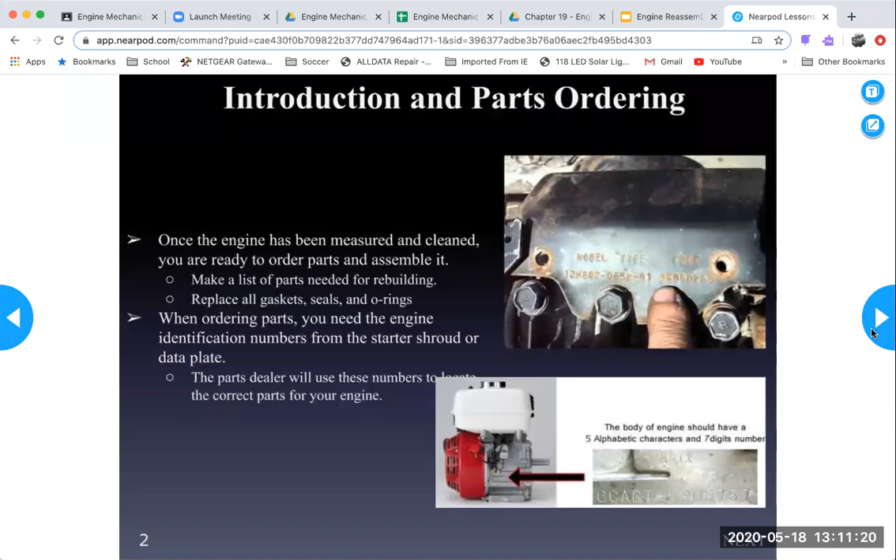Also, on overhead valve engines, these numbers are stamped on the valve cover on a Briggs & Stratton. Different manufacturers put them in different places, so you just have to look for them. You need to have them all when you go to order parts - all those numbers are needed.

Briggs & Stratton uses 3 groups of numbers that they need for ordering. If you look at this example: 126L02, this is the model number. The next group, 1015-F1, this is the type number - I'll explain what all this means in a minute. The last group, 1003-1858, this is the code number.

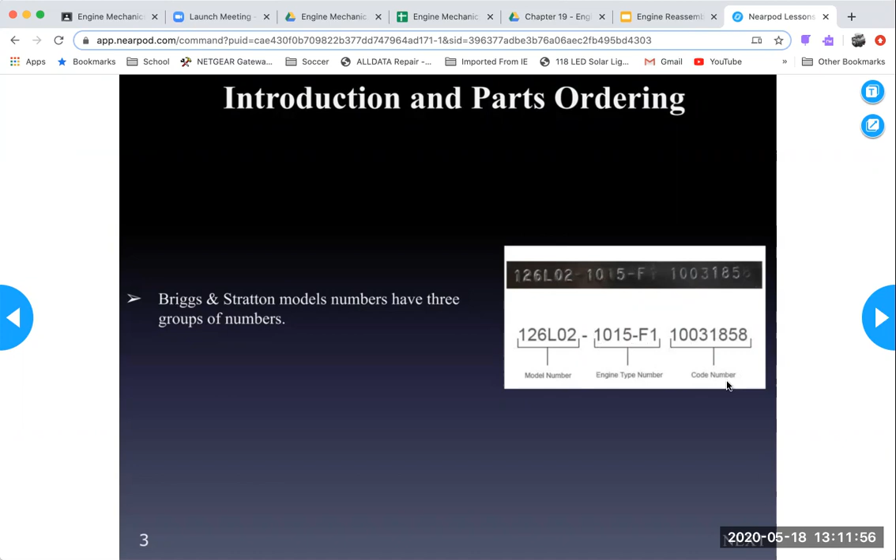Taking each one: the model number explains how many cubic inches the engine has, what kind of starter is installed, and other important information for ordering parts. It's going to be either a 5-digit or 6-digit number. If it's 5 digits, which they haven't made in a long time, the first number is the cubic inch displacement. But typically it's 6 digits, so it's the first 2 numbers. Look at my example here, 42 - that's the cubic inch displacement, a 42 cubic inch engine.

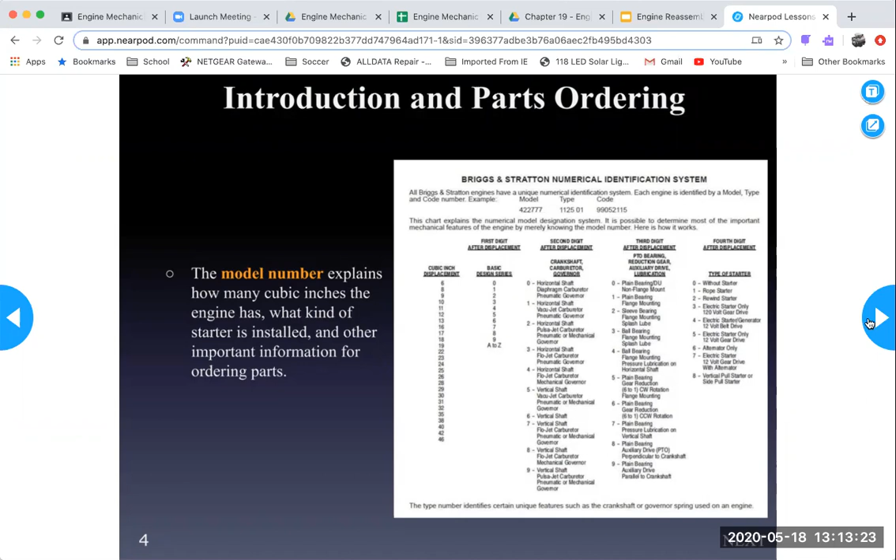Then you can see other information, not so important to us, like crankshaft position, the carburetor installed, whether it has a PTO or power takeoff, gear reductions, and the type of starter. This information is important for the engine, but not really for looking up parts. The whole model number is important, but breaking it down to understand what all those numbers mean isn't super important.

Brings me to my first question of the day: what engine number is 123K02 in the picture? So if I make that picture bigger - 123K02 - that first group of numbers, what does it mean? Is that the type? Is that the code? Or is that the model?

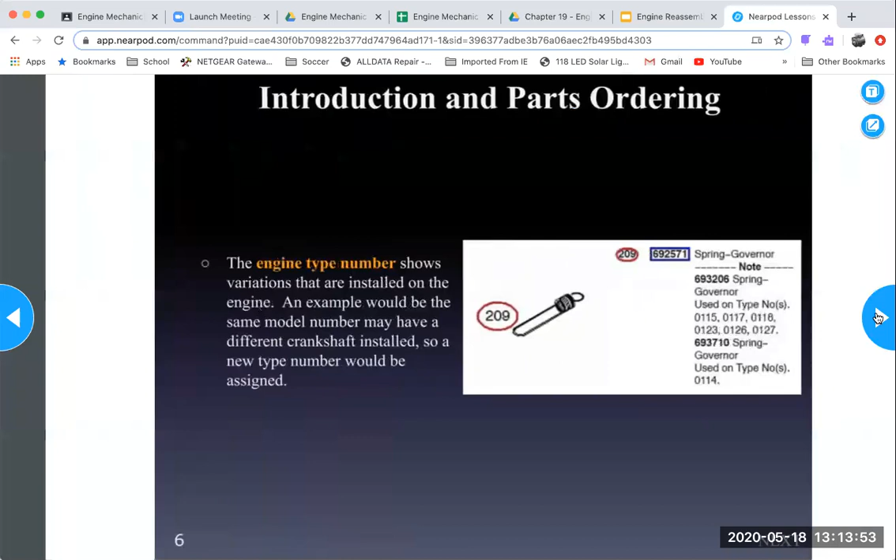The engine type number shows variations that are installed in the crank or on the engine. An example would be an engine that has the same model number but may have a different crankshaft installed.

So using this example, 692571 would be the spring for a governor, except if your type number was listed under these alternate part numbers. If your type number was 0114, you would use part number 693710. If your type number was 0115, 0117, or 0118, you would use part number 693206.

If your type number was not listed here, then this is the primary part number, 692571. I gotta say, since computers started, this has made it way easier. You just pick the right type number and you'll get the right part, the right spring in this case.

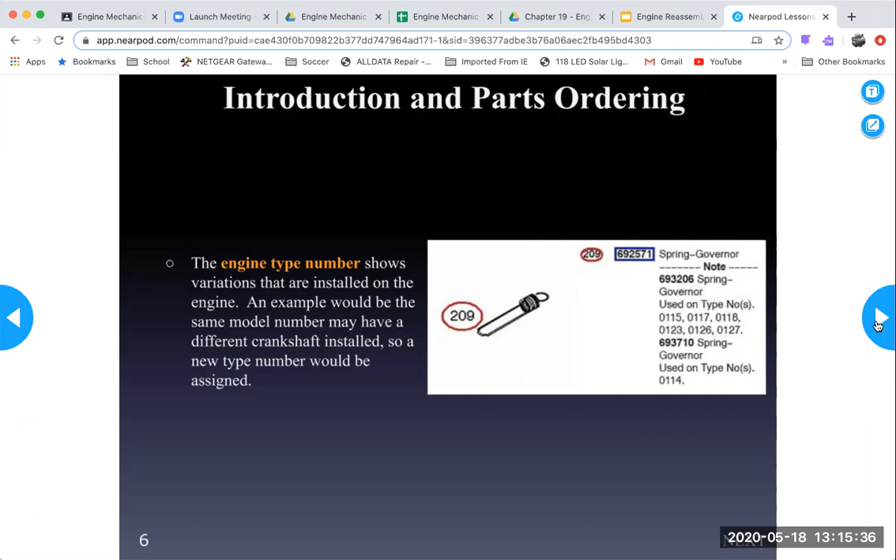When they used to have books and microfiche, this was pretty confusing. So these would just be variations - sometimes they'll have different crankshafts installed in the engine. The model number is exactly the same, the engine is exactly the same, but the only difference is they put a different crankshaft in there, so the type number would change while the model number stays the same.

Once again, looking at this picture, what engine number is 0195E1 in the picture? So 019, oh that's a 3, E1. What does that mean? Is that the model, code, or type?

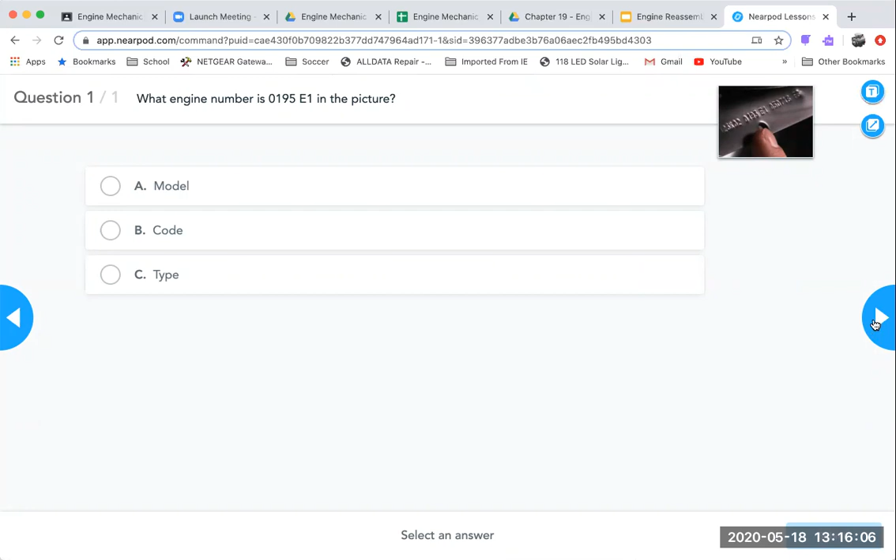Now the last number, the code number, is basically a date code that shows when the engine was made and by what plant. So if we break this thing down, the first two numbers is going to be the year the engine was made. In this case, the engine was made in 2001.

Then we have the second group of numbers, 06. This tells us the month - in this case, the month was June. And then the next two numbers, 1, 2, tells us the day. So this engine was made on June 12th, 2001.

And the last group of numbers, 01, is the assembly line and manufacturing plant. This allows Briggs & Stratton, in this case, to really focus on if there's warranty issues - they could tell you the day, the month, the year, and what assembly line and plant just by looking at these numbers, and if there's an issue coming, they could figure it out and possibly find a solution.

Maybe the rod caps were coming loose, the connecting rods were coming loose, and then they investigate and find this time frame where all this is happening, and they can go right to there and find maybe that worker wasn't doing his job properly. The supervisor can get involved and fix these problems. Or maybe a torque wrench used on the assembly line was not calibrated properly - they could fix those problems.

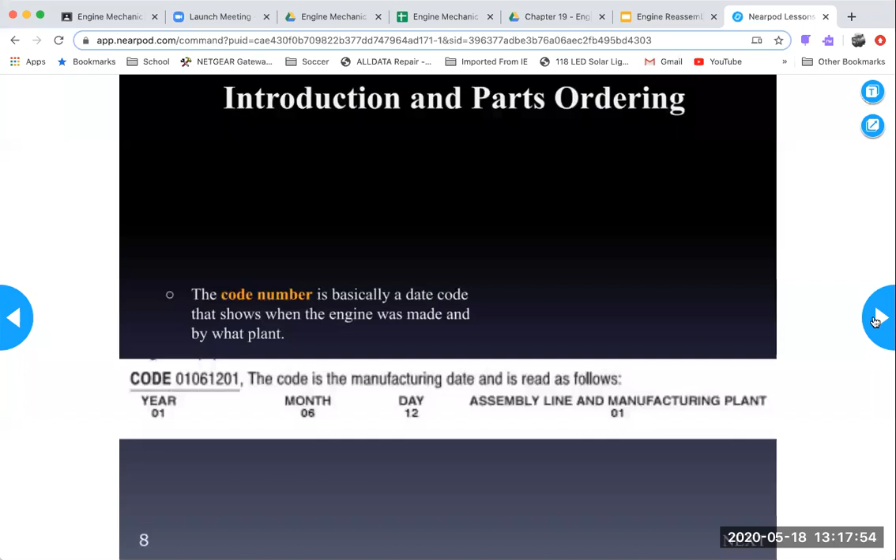Next question: what year was this engine made in? We're looking at these numbers - what year was that engine made in? 2007, 2005, or 2018?

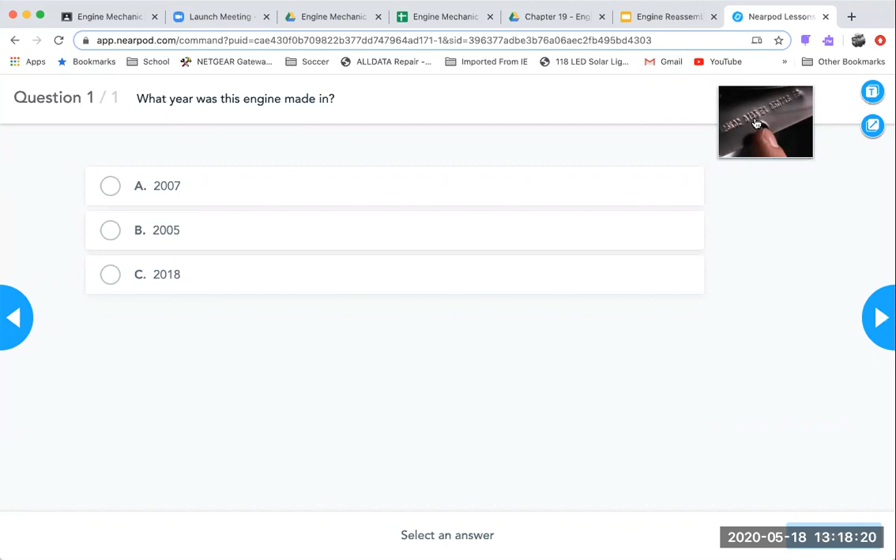Replacement piston notes: you must select the correct piston rings for your engine. So if the cylinder was not resized, you're going to use standard rings. If the cylinder was resized, you're going to be using an oversized piston.

In our case, I'm looking at this right here - it says 0.010. That means this piston is 10 thousandths of an inch oversized. So your cylinder would be honed or bored out 10 thousandths of an inch, but you would have to make sure that you had 10 thousandths of an inch rings to match the piston. If you don't, you're going to have excessive ring gaps and cause compression loss.

Some manufacturers sell chrome-plated piston rings for cylinders that exceed the wear specs, and this allows the cylinder wear to exceed the specifications, but not by much. I think Briggs & Stratton, if you go up to 5/1000ths of an inch, you can use these chrome rings. I'm still not sure how they work, but they do sell those, or they used to at least.

Some oil rings have expanders that fit on behind the oil control ring to help control oil in worn cylinders. So you think of like a little spring-loaded expander that kind of forces the oil ring out harder against the cylinder to help control oil flow. Generally, I don't really use those things - if the cylinder is worn out like that, if it's feasible, I'd have it rebored and put a new oversized piston and rings in it.

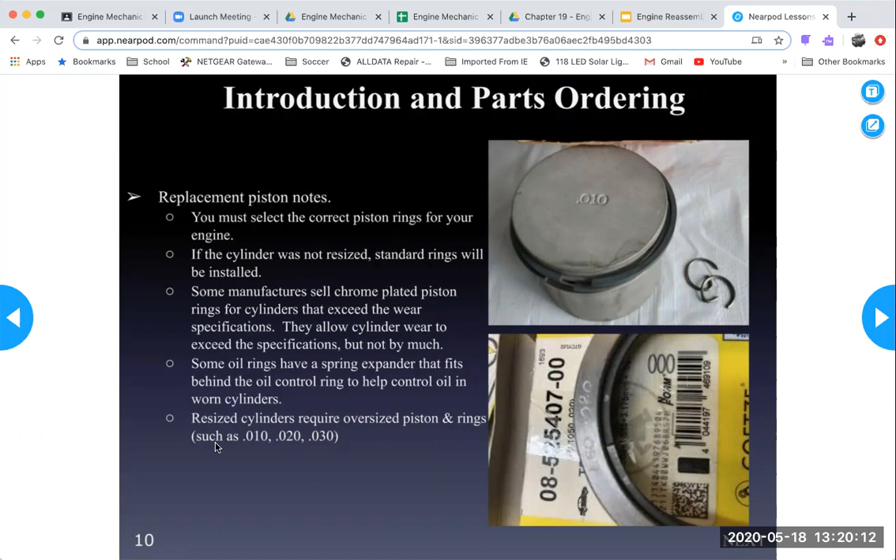All gaskets are replaced when an engine is overhauled. Don't try to use old, worn out gaskets. Normally, you can buy a gasket kit that gives you everything you need rather than ordering every single gasket. Gaskets are needed to seal the very small irregularities on the part surfaces, and you should never reuse an old gasket.

Before installing new gaskets, clean the gasket surface and the bolt holes around there. Make sure they're cleaned good. You can use a gasket scraper, or they sell a Scotch-Brite pad that goes on the end of an angle grinder, and they take gaskets off real quick. Just make sure you're not using that to remove aluminum. Same thing with a gasket scraper. You're just trying to take the gasket material off, not scrape into the aluminum. You got to be careful when you're using those gasket scrapers.

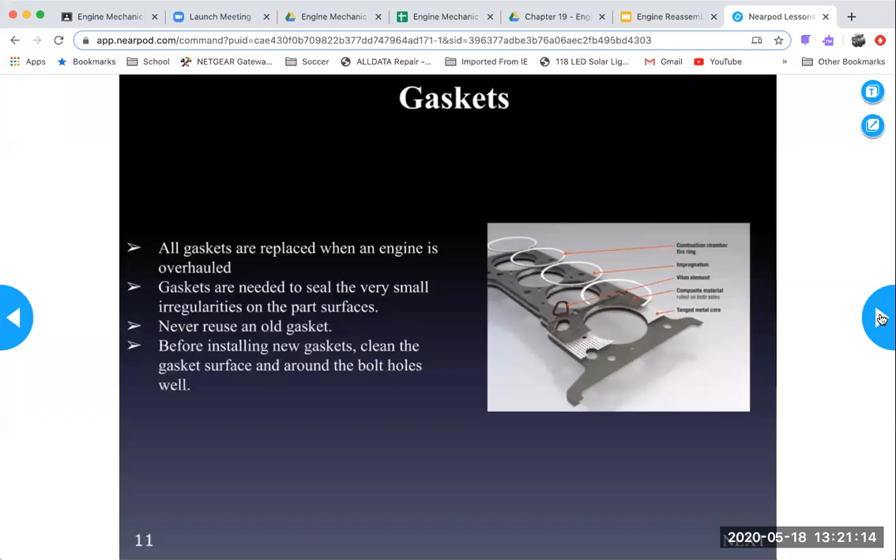We talk about gaskets, and there's three common types of gaskets that you're going to run into. Cork, up here in the top right-hand side, is used in low temperature areas and pressure. So there's not a lot of pressure here, not a lot of high temperature here. And it forms to pretty much any shape. It's a very soft material, squishy, and it'll form into pretty much any shape. So we often find these in valve covers. That's a good place where you often find cork. There's not a lot of hot temperature up there in the valve covers.

The other one would be paper. Paper is mostly used on crankcase covers. I've pretty much always seen paper used on crankcase covers. Also, you'll find paper gaskets on the backside between the carburetor and the air filter. You'll find paper gaskets on the cover that goes over the valves on an L-head engine. You'll find paper gaskets throughout the engine.

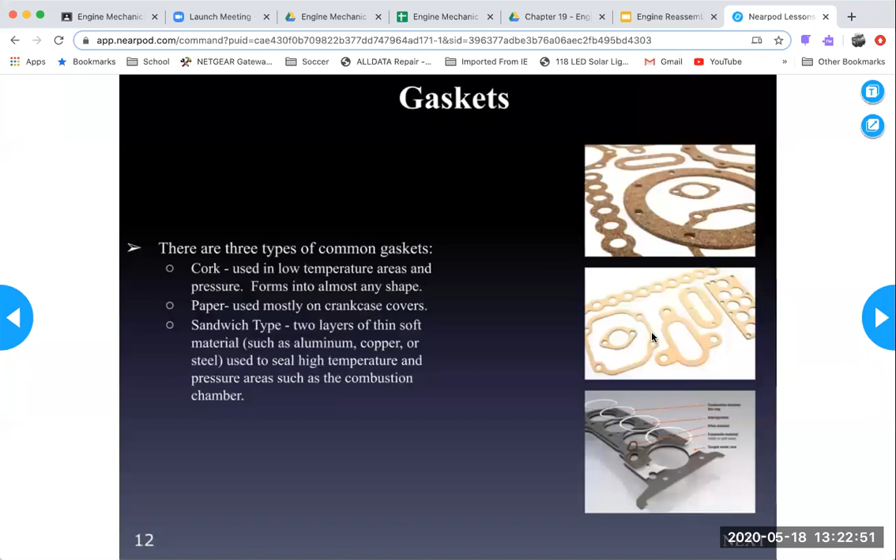And the last one is what we call the sandwich type. This is made of two layers of thin, soft materials such as aluminum, copper, or steel, and then it's got a coating that they coat over the top of there. These are used to seal high pressure, high temperature areas such as the combustion chamber. So your head gaskets are typically going to be a sandwich type gasket, especially on the small engine side.

Question. The type of gasket mostly used on crankcase covers is: A, sandwich type; B, paper; C, cork; or D, seal. What type of gasket is mostly used on crankcase covers?

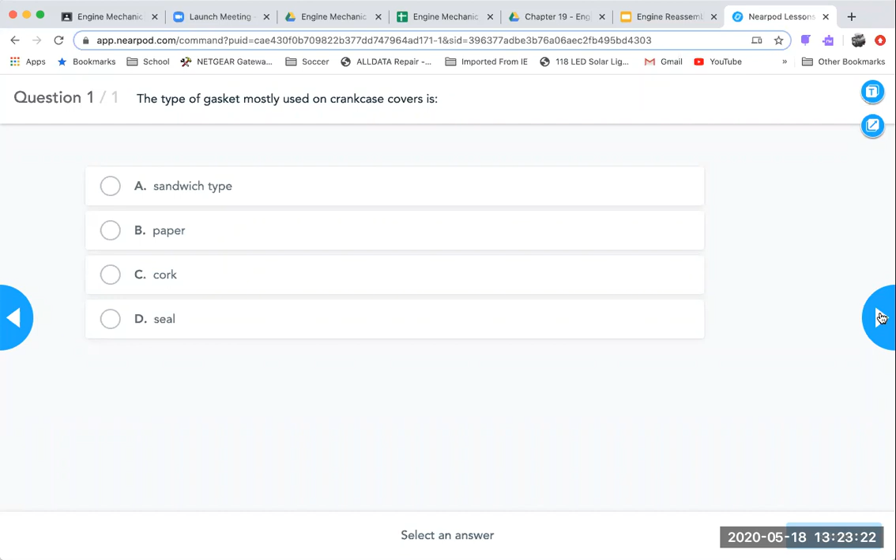Another question about gaskets. The type of gasket used in low temperature areas and pressures, and that forms into almost any shape, what type of gasket is that? Sandwich type, paper, cork, or seal? So for this type of gasket, think not head gasket, think of a valve cover gasket, not a lot of pressure, not high temperature. What kind of gasket would you use in there?

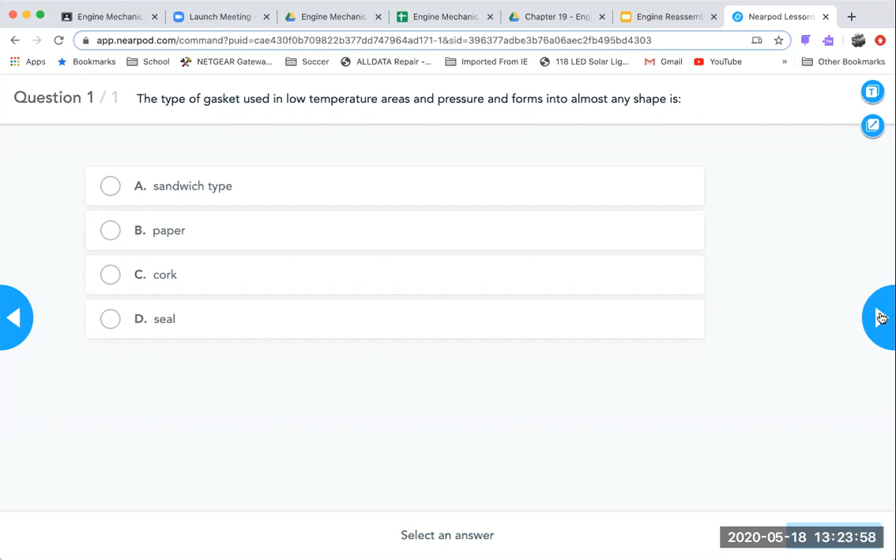And the last question here: this type of gasket uses two layers of thin, soft material that is used to seal high temperature and pressures. Is that the sandwich type, the paper, cork, or a seal?

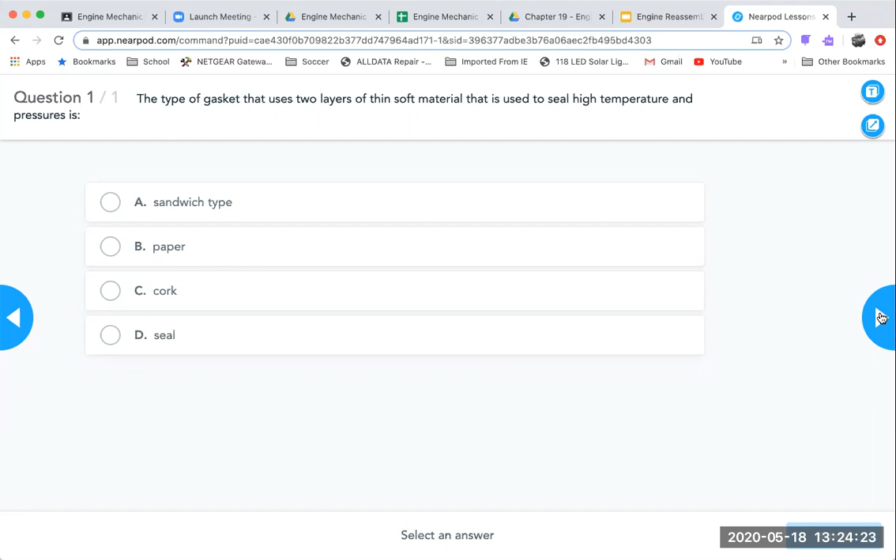Now, seals are used to prevent leaks around areas that cannot be sealed with a gasket. So you're not going to have a gasket that can seal up oil around the crankshaft, say, so we have to come up with a different plan for that. And once again, just like gaskets, oil seals are always replaced when you overhaul an engine. Any seal, put new ones in.

There are two main types of seals that we use. The O-ring is a solid ring used to seal areas of high pressure, such as oil pumps and cylinder heads on some motorcycles. We don't really find small engines with O-ring heads to seal the heads, but in the motorcycle world we do. So with seals and O-rings, they can take tremendous amounts of pressure.

Now the lip seal uses a wiper lip to prevent leakage around rotating or sliding parts, such as the end of a crankshaft. They can't handle high pressure like O-ring seals can, so lip seals are used in areas that don't have high pressures. Crankshafts don't have a lot of pressure inside the crankcase, so we can get away with that.

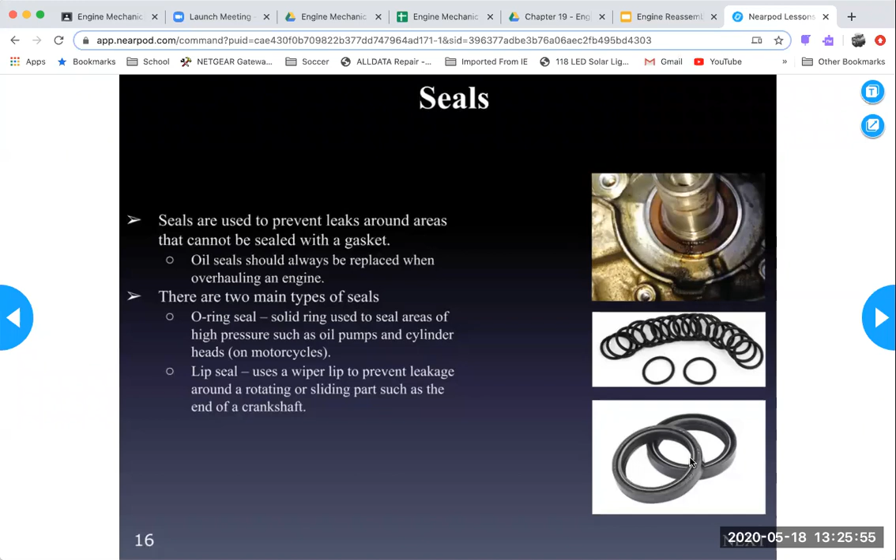The type of seal that uses a solid ring to seal areas of high pressure—since it's using a solid ring—is that called a face seal, a lip seal, an O-ring, or a rubber seal? A solid ring.

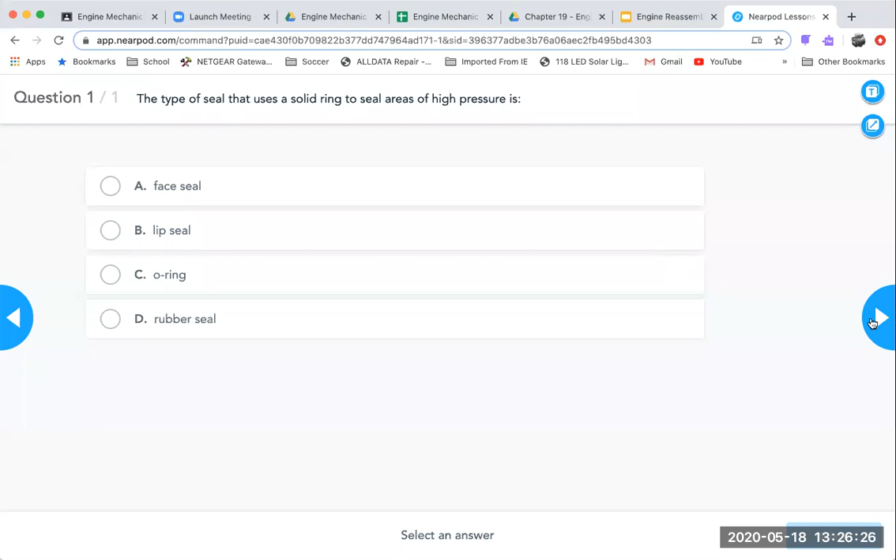Next question: the type of seal that uses a wiper lip to prevent leakage around a rotating or sliding part—is that a face seal, lip seal, O-ring, or rubber seal? So this time it uses a wiper lip to prevent leaking.

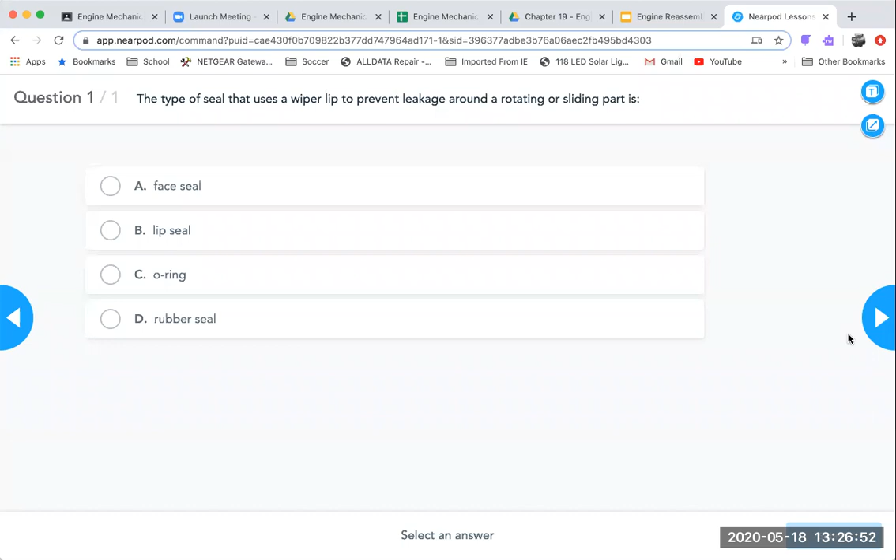All engine parts should be lubricated during assembly. You don't want to be putting engines together dry. You've got to have time for the oil pump to start lubricating the engine, and that short little time it takes could destroy an engine without oil.

Assembly lube is a pretty good stuff to use to lubricate bearings on assembly. It's kind of like a thick grease, but it works great for areas like bearings and camshafts. Once again, it provides lubrication until the engine starts pumping oil throughout.

Assembly lube can also be used to hold needle bearings in place during installation on 2-strokes. On 2-strokes, you have needle bearings laid in the connecting rod and the connecting rod cap. You grease up the area with assembly lube, then lay those bearings in place so you can reassemble it. Otherwise, it would be nearly impossible to hold all those needle bearings in place while doing this.

Never, ever, ever use assembly lube on cylinders and rings. You're going to use motor oil for cylinders and rings. Assembly lube is for bearings, camshafts, areas like that—not for pistons and rings.

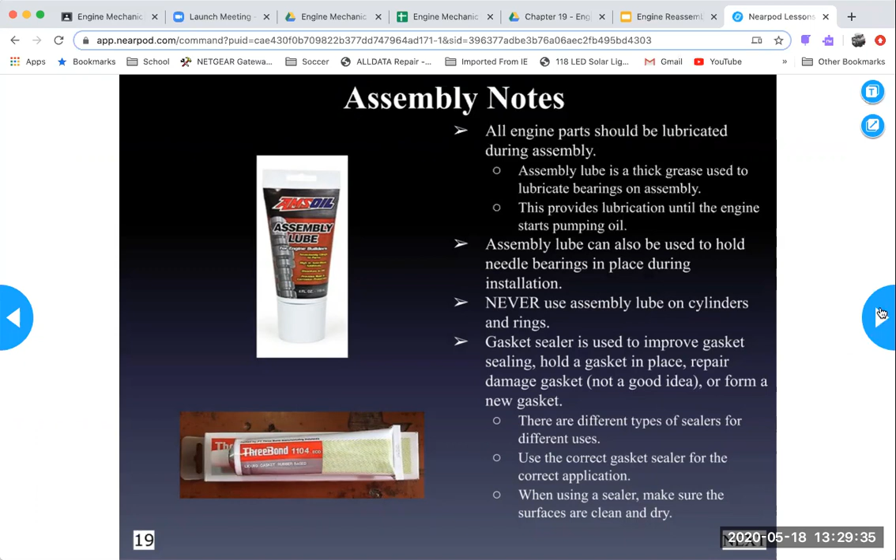When using the sealer, make sure the surfaces are clean and dry—it does not stick to oil. So make sure those sealing surfaces are wiped down really good and dry, then put a light coat of gasket sealer on the case halves.

A clean area is very important for good engine overhauling. The following should be done before you start reassembling the engine: clean your hands—don't be using some grubby old hands you just tore apart a dirty old engine with. Make sure your hands are clean.

Clean your workbench off—the area where you're going to reassemble the engine, you want to make sure it's nice and clean. Make sure the tools are clean too; you just got them all dirty from disassembling a dirty engine. You've got to clean those things off, otherwise you're going to put dirt back in the engine and ruin what you just rebuilt.

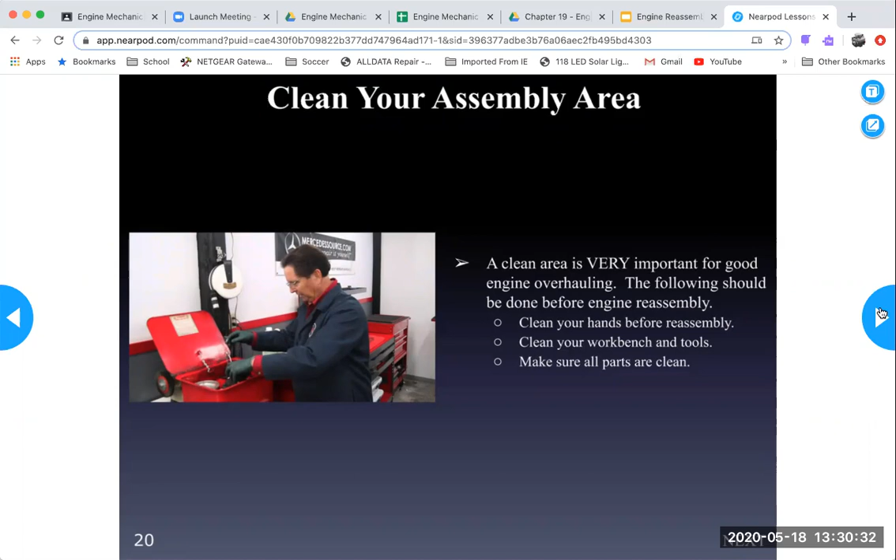Make sure all the parts are clean. You don't want any dirt whatsoever to get back inside that engine, so make sure everything's good and clean. I typically take the engine apart in one area and have a whole other area to reassemble. I wash the parts down, clean them up real good, and then put them over in that clean area.

When installing the valves, the following should be followed. Install the valves in the same position in which they were removed. The bigger valve will always be the intake valve, and the smaller valve would be the exhaust valve. You just gotta make sure the valves are in the right place.

Lubricate the valve stems with oil. And some valve springs have tighter coils on one end that must face toward the valve head.

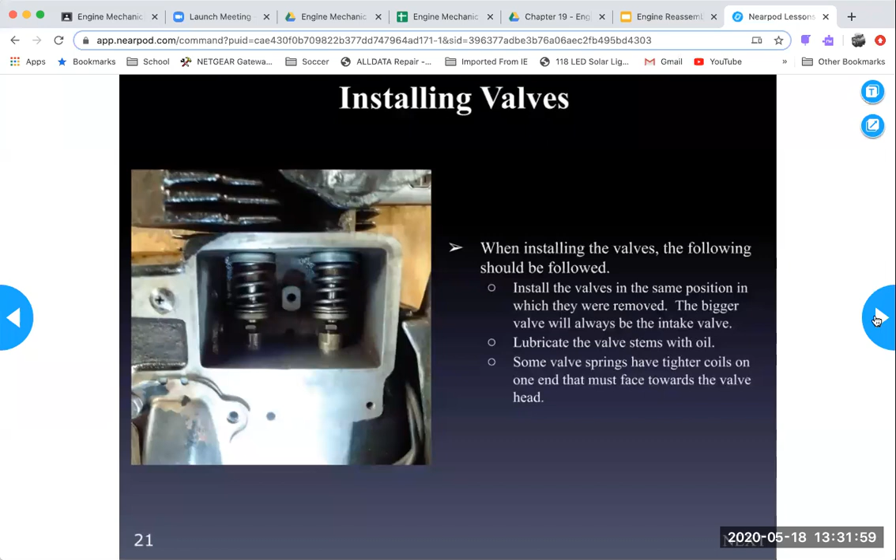Now, that being said, if that was the case, these would be upside down, because the tighter coiled windings always face toward the valve head, which is up here in this case. So the tighter wound area of the valve spring always faces toward the valve head. Looking at this thing, it's just because of the way this is made, this really isn't tighter down here. They really don't have them upside down, but you'll distinctly see if they get tighter and tighter. Make sure they're facing toward the valve head, not toward the stem.

That takes me to my next question. Some valve springs have tighter coils on one end. Which way must the spring face? A, toward the valve stem, or B, toward the valve head?

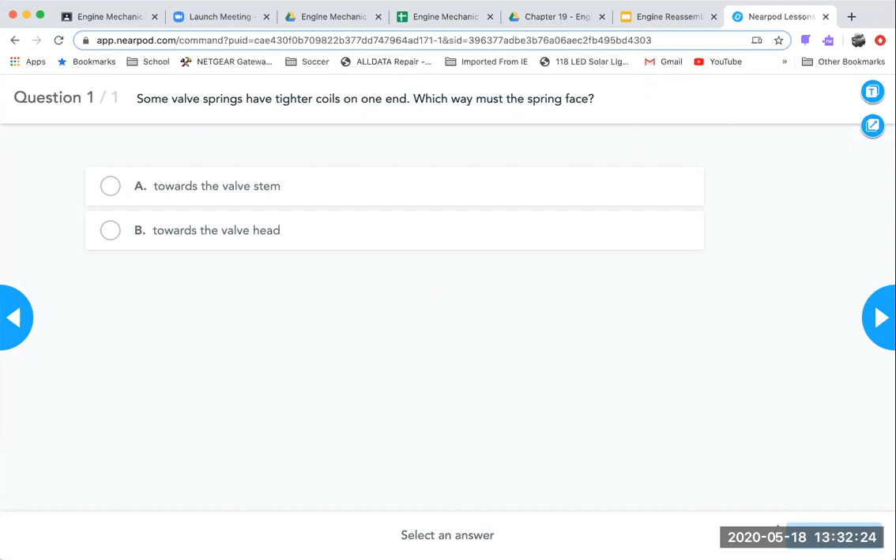When installing the piston into the connecting rod, watch for the following. Assemble the piston to the connecting rod according to the instructions in the service manual. There might be 3 pages of ways to assemble these things, especially if you get into some of these Briggs manuals. You've got to make sure you look in the service manual and get the piston-to-rod orientation right.

Some piston bosses on 4-stroke engines are offset, and the offset is used to control the thrust forces on the piston skirt, requiring the piston to be installed in the correct position. 2-stroke pistons must be installed properly or the engine will not run. You cannot be flipping around a piston on a 2-stroke. It's got arrows or dots or something that orientates it to the connecting rod properly.

The connecting rods are made with oiling notches and/or oil dippers that must be facing the correct direction, and these parts will only work properly in one direction and cause engine failure if installed wrong. The connecting rod must be installed correctly for proper lubrication.

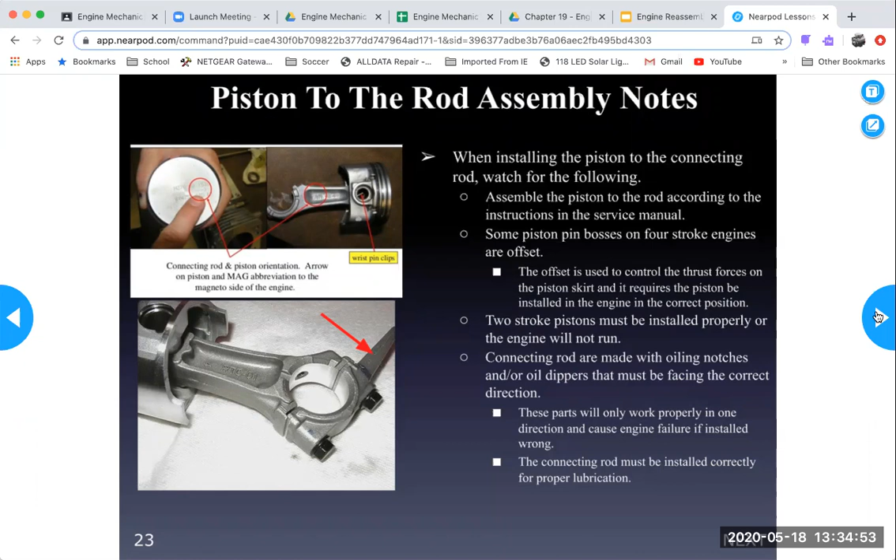My next question: the connecting rod assembly must be orientated properly to the A, cylinder block, B, piston, C, instructions in the service manual, or D, crankcase cover.

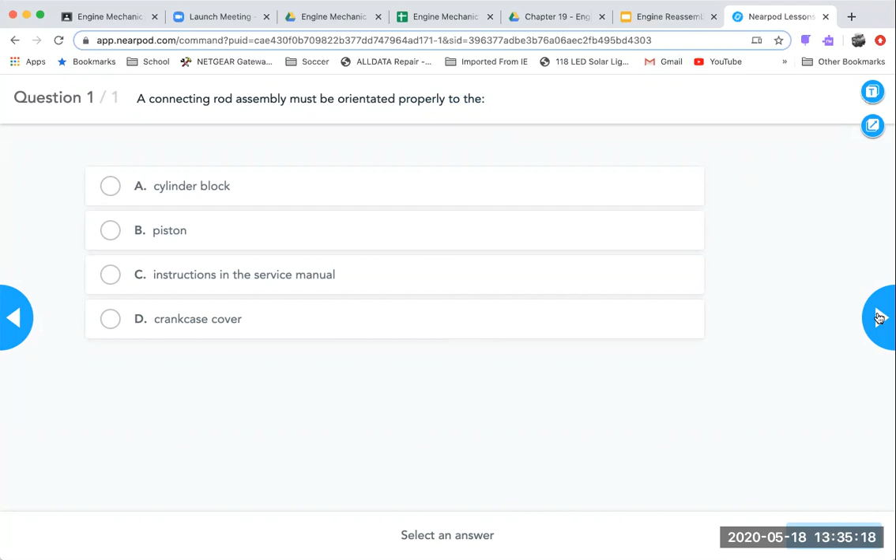And that is the end of day one lesson. Now tomorrow we'll get into the next lesson. We'll get into expanding and continue on some of these important things we need to know about as we reassemble these engines. All of this information can be used on your motorcycle, your ATV, your small engine, and even car engines. So it's pretty important stuff if you're into the motors. Thanks for coming, thanks for stopping in and watching this video, and I'll be seeing you for day 2.